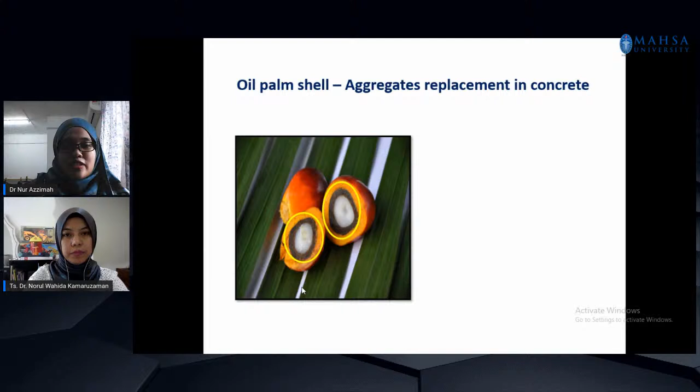So this is oil palm shell. You can see this one, the chocolate color here. We already did the research, the observation and testing and so on. This oil palm shell has almost the same properties as wood. We know that wood has been used as a material to build houses also. So this oil palm shell also can be used to replace 100% aggregate inside the concrete.

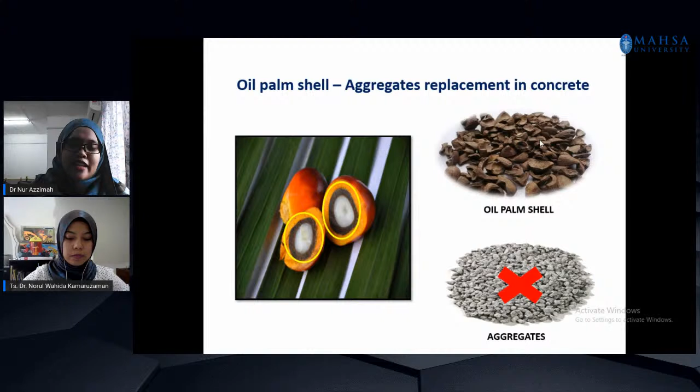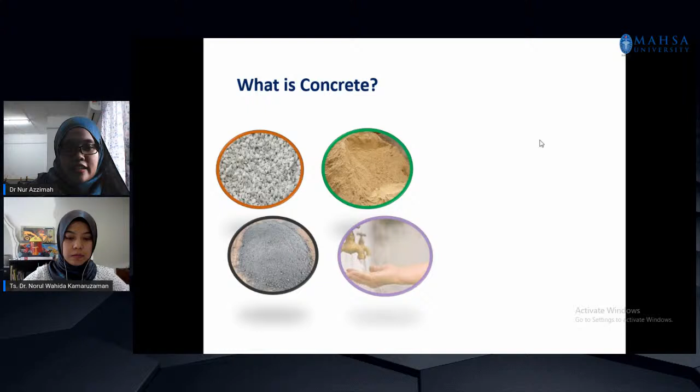And for those who don't know, concrete is actually a mixture of coarse aggregate, sand, cement, and also water. If we mix these together, it will produce concrete, which is very hard, very high strength. Due to that, people love to use concrete because of its strength. You can design the strength up to hundreds of megapascals, and also it is versatile, and it is easy for us to mold the concrete.

That means if, let's say, you want to make a concrete which is rectangular, you can just build a mold, and then pour the concrete inside the mold, so it will follow the shape of the mold. If you want to make it triangular, just make a mold which is triangular in shape, then pour the concrete, and it will become triangular. So that is why people love concrete. And also concrete is highly durable, meaning it has very high durability towards sulfate, acid, and so on.

So this is the difference. This is concrete, and I think most people are confused between concrete, mortar, and paste. Actually, concrete is a combination of coarse aggregate, sand, cement, and water. But mortar is the combination of sand, cement, and water; you don't have coarse aggregate in its mixture. And paste only has water and cement. So that is actually the difference between concrete, mortar, and paste.

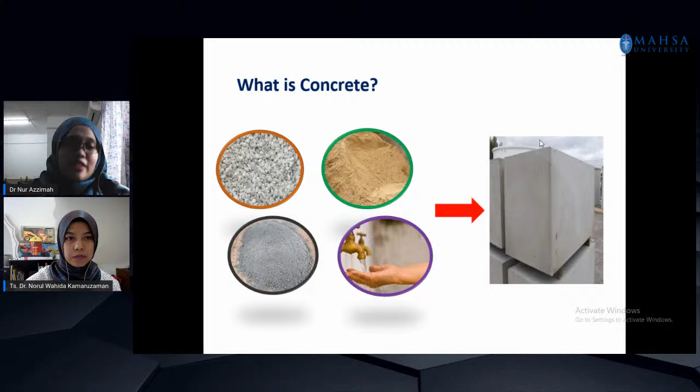And I see that a lot of uncles and aunties usually say that this one is made of cement. They actually don't know the real term, concrete. All right, so I hope that you get something from here. Correct. The one just now is oil palm shell. Now this is palm oil clinker. This palm oil clinker can be used to replace both sand and coarse aggregate.

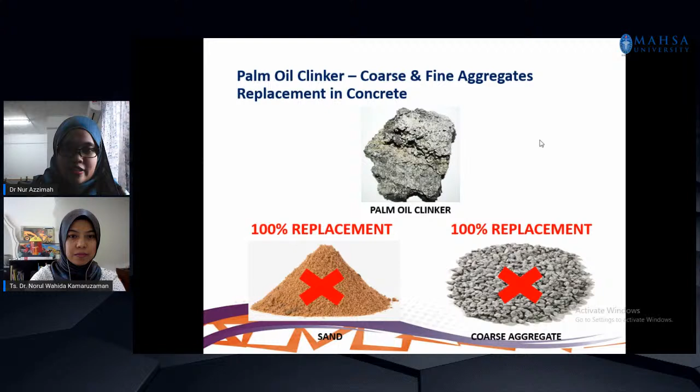If, let's say, we want to replace sand, that means we have to crush this clinker to become smaller. Then only can you replace the sand. If you want to replace coarse aggregate, you have to crush it until certain sizes, let's say passing 10 millimeter and retained on 5 millimeter, then only you can use it as a replacement for the coarse aggregate. All right.

These ashes have a very high pozzolanic reaction, so they can be used to partially replace cement. So this thing can only partially replace the cement. So now people are currently trying to find the sources.

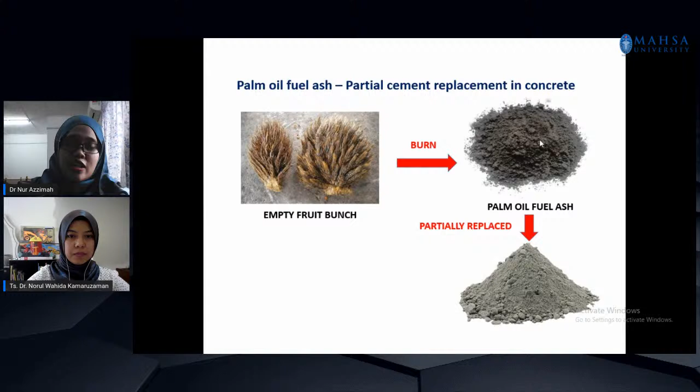I mean, trying to find whatever things that are similar like this POFA to replace the cement, because we know that if you want to take the cement, you have to slaughter our hill. You know, we have to destroy the hill, then we have to crush. So because of that, we are going to destroy the ecosystem. So now we are trying hard to find what we can do to replace the cement, right?

All right. So these are the findings from the previous research. So actually, not only us do this research. A lot of people have done it, but they are doing it in different types of concrete. So in 2004, we have Mannan from UTM. I think he's the first one who figured out this oil palm shell. He used this oil palm shell to replace aggregate

inside the lightweight aggregate concrete, and then in 2013, from USM, I think Alengaram, he replaced it in foam concrete, and then Alengaram also replaced oil palm shell in geopolymer lightweight concrete. Same goes for the palm oil ash. It has been used as a partial replacement of cement inside high strength concrete, and then in aerated concrete, foam concrete, as well as geopolymer concrete, right?

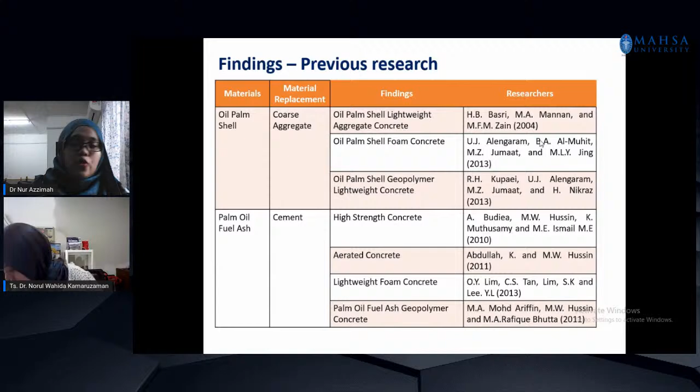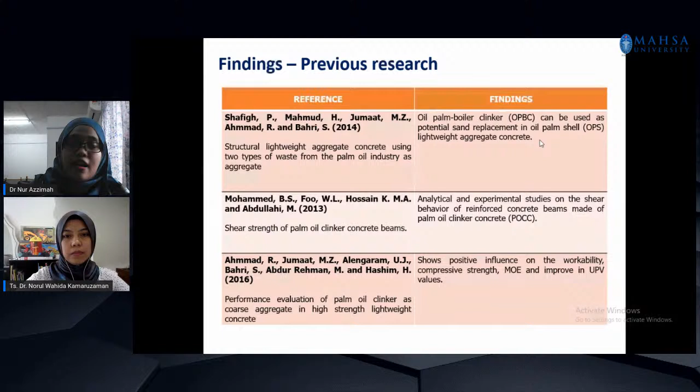And also the palm oil clinker has been used before. They use it as a coarse aggregate replacement and also sand replacement to produce beams and high strength lightweight concrete. The palm oil clinker can usually produce a very high strength concrete, which has good potential, because this high strength concrete is used in the construction of bridges and high rise buildings. So these are the previous research that has been done.

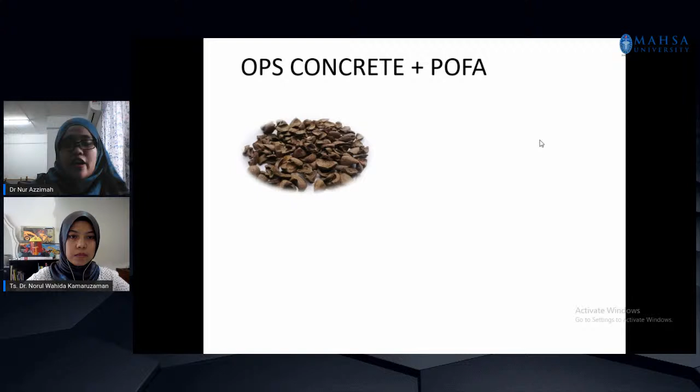All right. So what makes us different from the rest of the researchers is that we combine this oil palm shell and also POFA inside our research. We combine the oil palm shell and the POFA, which is the palm oil fuel ash, and then we produce this kind of concrete. So if you have the intention to try, these are the materials that we have used.

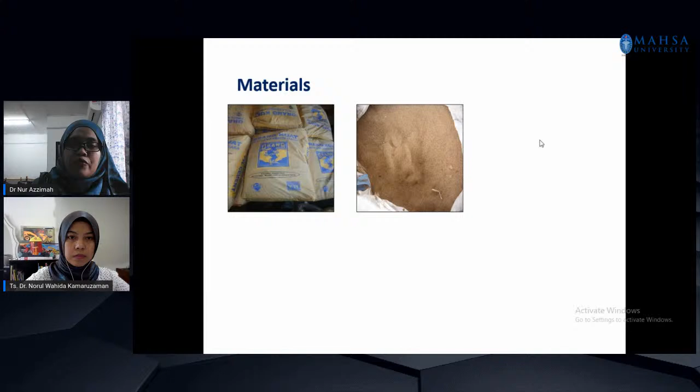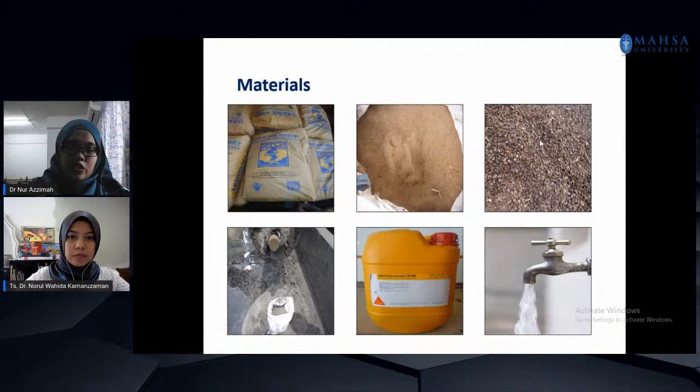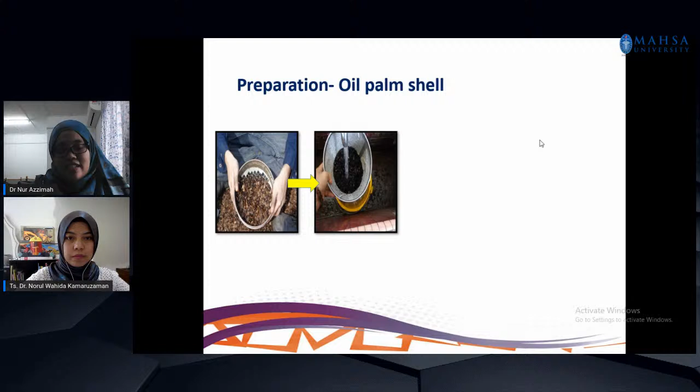So we need cement, sand, the oil palm shell, the POFA, water, and also we add some superplasticizer, because lightweight aggregate concrete consumes a lot of water, so we have to make sure that we don't use too much water. So we have to add either an admixture or superplasticizer to balance the water, right? And also, if you want to use this oil palm shell, you cannot simply take it and replace it inside the concrete. You have to do some processing.

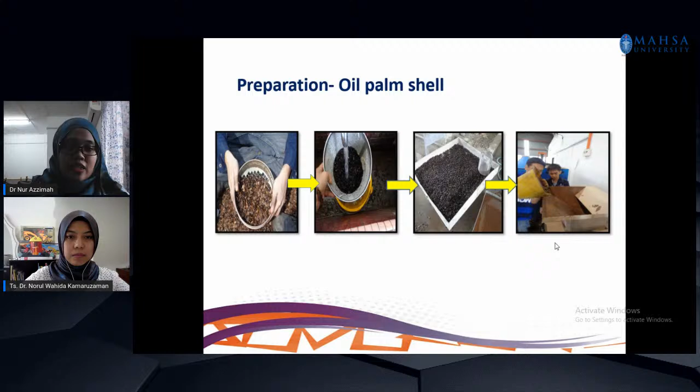So upon taking the sample from the factory, first you have to wash the oil palm shell, because this is an organic material. Sometimes there will be impurities, sometimes some insects, so you have to wash it first. After that you have to dry it until it reaches SSD, which is saturated surface dry condition. After that you have to crush it using the jaw crusher until certain sizes have been achieved. Then only you can use it inside your concrete, right?

And then for the palm oil fuel ash, upon taking it from the factory, you have to sieve it passing 300 micrometer, and then you have to grind it. Last time I used a Los Angeles abrasion machine, quite a big scale one. And we cycle it for about 30,000 cycles, which takes around one whole week. So it takes like 1 week for 2 kg of sample to grind.

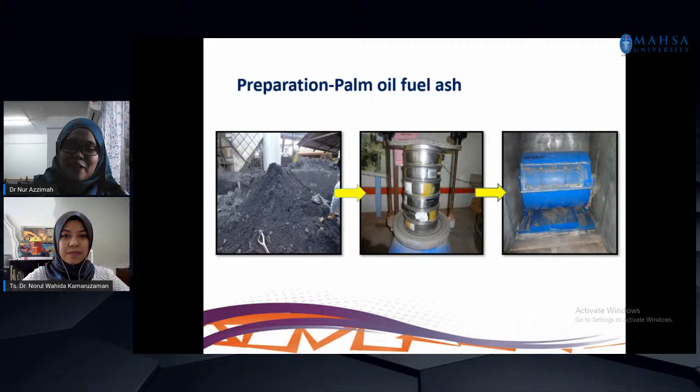And then after that you have to sieve it passing 45 micrometer. We figured out that after we grind for 30,000 cycles, the particles become very small, passing 45 micrometer, in order to increase the pozzolanic reactivity of the POFA. So we need at least a type F pozzolanic material, then only we can put it inside this concrete. Actually we need to do a lot of testing and so on, but we will discuss that later, right?

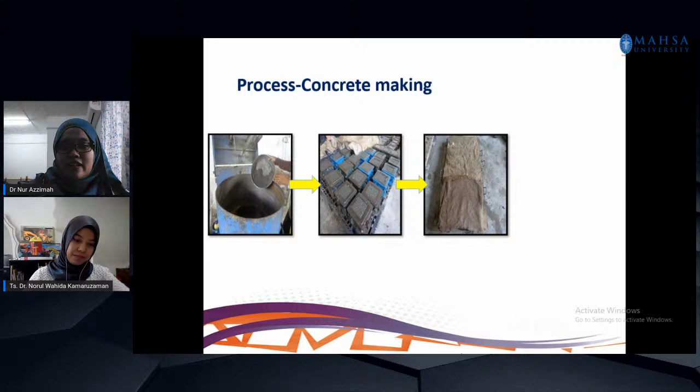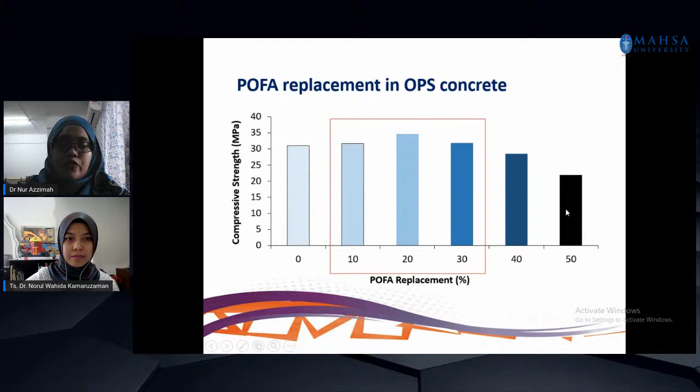Zero means the OPS concrete without any POFA, and 50% is up to 50% replacement. So we can see that these three produce the highest strength. And we can also see here that at 40% and 50%, the strength is decreased.

And we also figured out that 50% is not suitable to replace the cement, because when the pozzolanic material is higher, it cannot react with the lower amount of cement. The pozzolanic material is actually going to react with the calcium hydroxide inside the cement and produce CSH gel. This CSH gel is like a glue to bind all those things together.

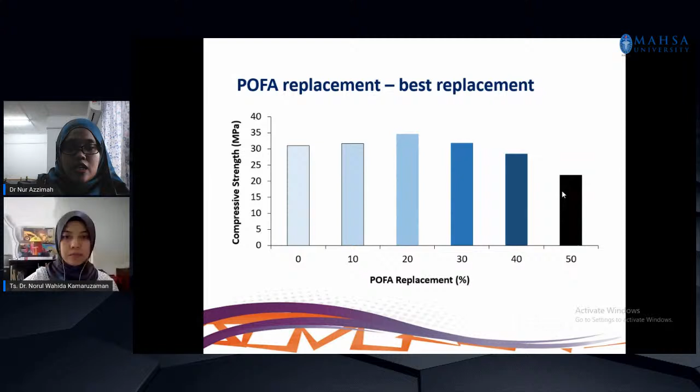But if the pozzolanic material is too high, then the cement is too low, and they cannot bind together. So 50% is not suitable, because we can see here the strength becomes lower than 25 megapascal, right? Most of our buildings in Malaysia have to reach 30 megapascal for structural buildings. And the best replacement is 20%. So we recommend 20% of palm oil fuel ash inside the oil palm shell concrete. This is for the oil palm shell.

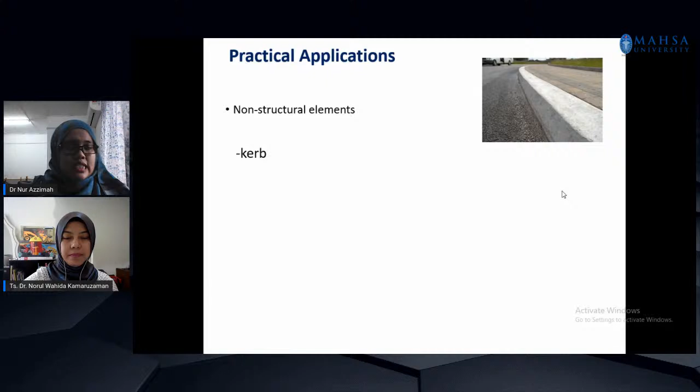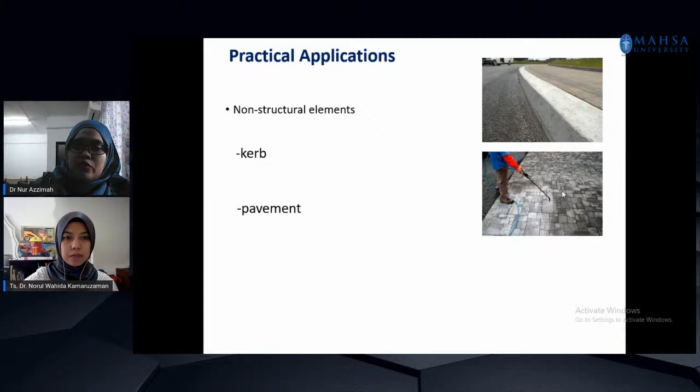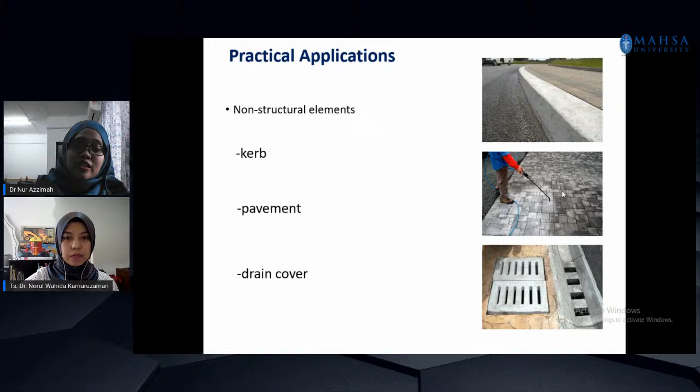And for the practical application, we recommend using it for non-structural elements. Although the strength is above 30 megapascal, we recommend it for non-structural members that don't have any loading on top of them, such as the kerb, the pavement, and also the drain cover. Actually some researchers have even built a house using the oil palm shell concrete. So this is for the oil palm shell.

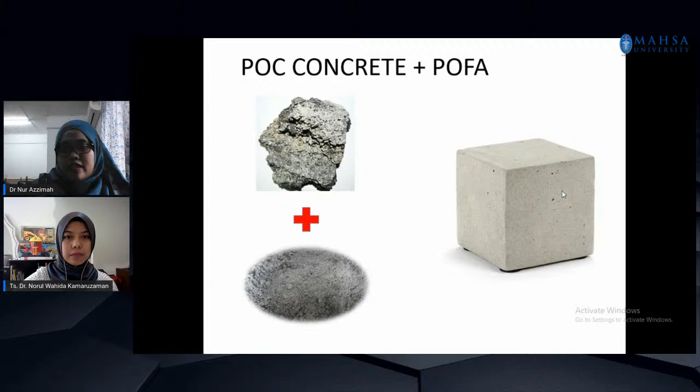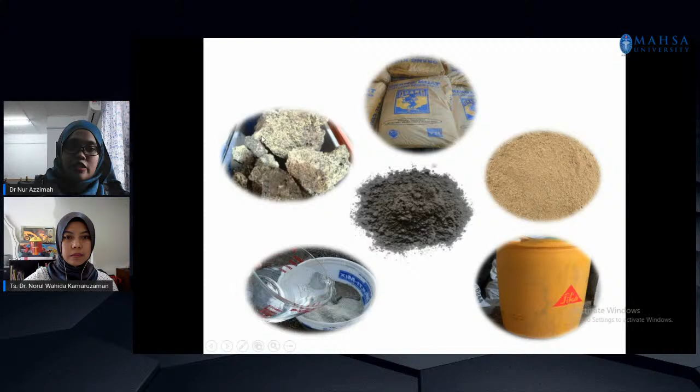Now let us go to the palm oil clinker. Just now was oil palm shell plus POFA. Now it is palm oil clinker plus POFA. This palm oil clinker will be used as a 100% replacement for coarse aggregate inside the concrete, and POFA as partial replacement inside the concrete. So it will produce the same thing, which is the concrete. These are the materials, the same as the oil palm shell just now. We just replace this one with the palm oil clinker.

And the same thing, you have to process the palm oil clinker. We cannot simply replace it, because it is big, actually. It's a big chunk of rock. So first, when you take the sample, you have to wash it, because there will be some fiber around the clinker, and this fiber, if you mix it in, will absorb a lot of water. So you have to clean it first. After you wash, you have to oven dry until SSD.

After that, you have to crush this palm oil clinker so that it becomes smaller particles. For me, last time I crushed and then sieved using a 10 millimeter sieve. Whatever passed the 10 millimeter sieve and was retained at 5 millimeter, I took and replaced inside my concrete. And for the palm oil fuel ash, I used the same method as for the oil palm shell. You have to oven dry, sieve using a 300 micrometer sieve, and then grind for 30,000 cycles. Only then can you use it.

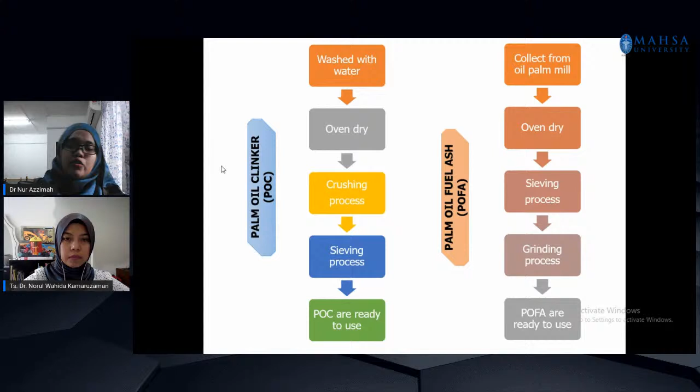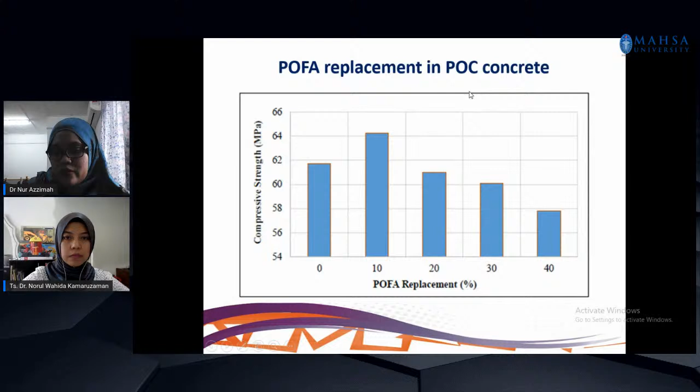Okay, and also for the palm oil fuel ash, we observe that 10% is the best replacement for the POFA inside the palm oil clinker concrete. So the difference: for the oil palm shell, we managed to get 20%, but for the palm oil clinker, we managed to get only 10%, right?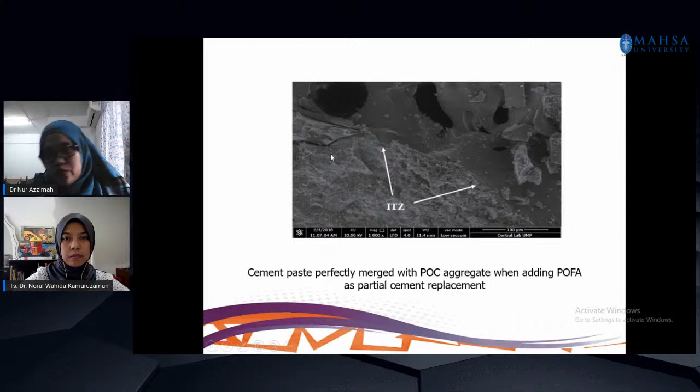And then also, when we put palm oil ash inside the palm oil clinker concrete, we looked at the cement paste. This is the ITZ, right? Interfacial transition zone. We use a high definition microscope. We can see that the cement paste perfectly merges with the aggregate when we add the ash inside this concrete. So it is quite smooth, right? So this is what we figured out from our research.

So what is actually the importance of this research? First, for sure, we are going to give the audience awareness on why we are supposed to preserve our natural resources, because our natural resources keep on depleting. So as humans, we have to try our best to preserve our natural resources. And also, we have to try our best to reduce the waste disposed by the industries. If there is too much waste, it will cause a lot of pollution, and also the country has to pay a lot of money

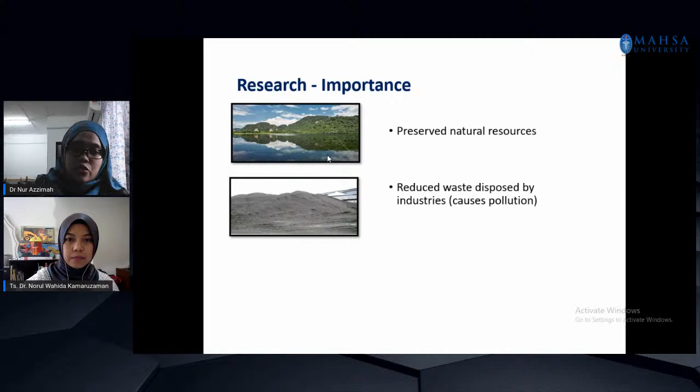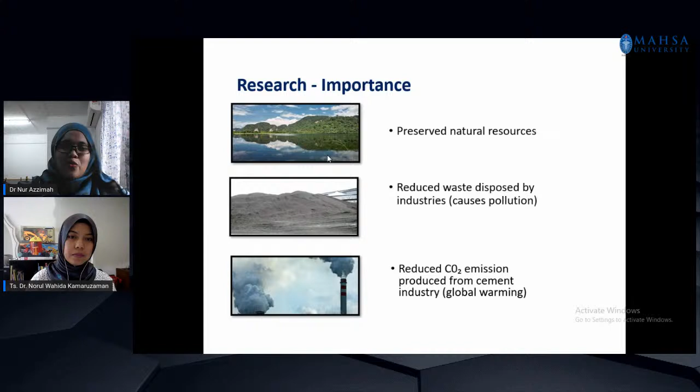in order to find a place to dump all this waste material, right? And also, we know that cement production produces a high amount of carbon dioxide. So by utilizing the POFA, we can help to reduce the carbon dioxide emission produced from the cement industry. And who knows, maybe later on, Malaysia can start to export the waste from our palm oil, which will also help to generate our Malaysian economy. Who knows? Right. So that is the end of my part.

I think maybe Dr. Nurul Wahida can share, because Dr. Nurul Wahida is one of the experts with high expertise in green building. As far as I know, she is one of the first persons to use laterite in concrete technology. Is it, Dr. Wahida? Can you share with us some of your research on laterite, please?

All right, of course, Dr. Azzimah, thank you. Actually, when we are talking about green materials, we are looking into something that contributes to our environment. It must not give bad effects towards the environment in terms of production, installation, even maintenance. So that's why we are looking into several materials that we are going to replace in our concrete production, materials that easily decompose, that can be renewed, and are able to prevent any negative impacts towards the environment.